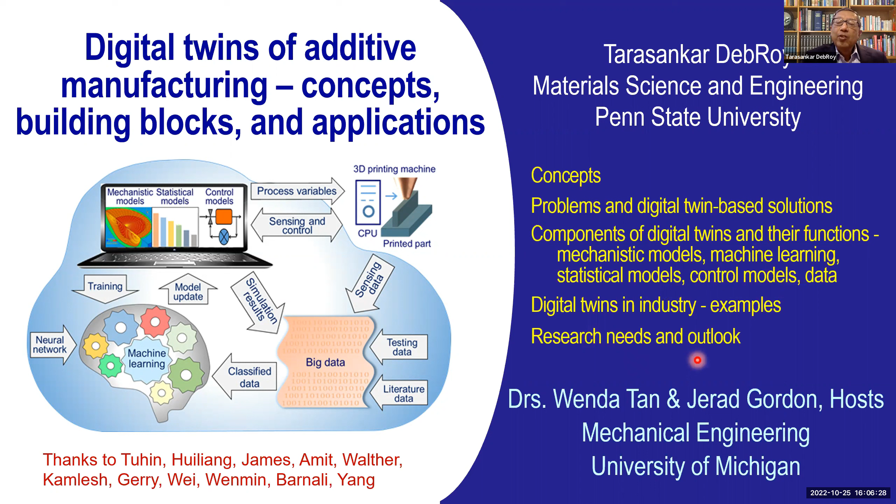Define a little bit about the components of digital twins, how it works, mechanistic models and data-based models, control models and data itself, and then how they are used in industry and what is in store in the future based on evidence.

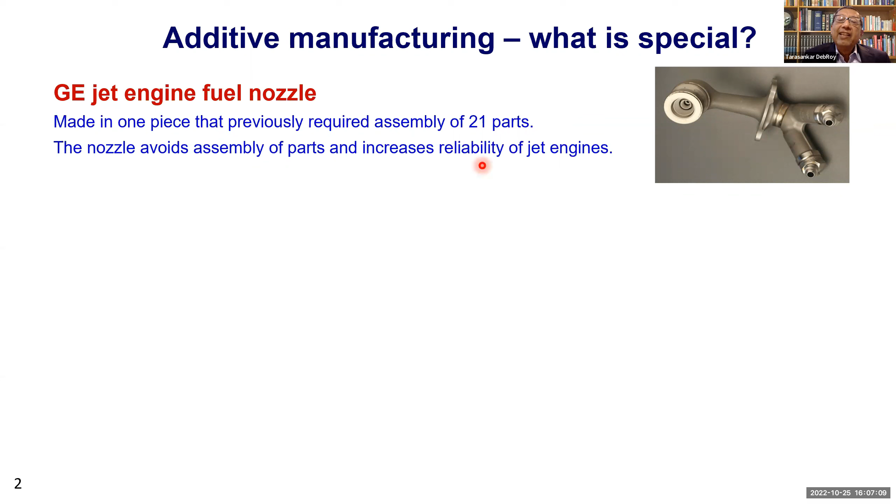So what is so special? The GE fuel nozzle is a component that is often cited as an example of the unique capabilities of additive manufacturing. This is made layer upon layer in thousands of layers, but previously it required assembly of 21 parts. Now this can be made with the new additive manufacturing process, and it has increased the reliability of jet engines according to GE.

We can make materials that are compositionally graded. This is a big deal in the nuclear industry, where we have many dissimilar alloy joints, particularly welded joints. These dissimilar alloy welded joints often fail because of high temperature degradation of property that we call creep degradation. Particularly carbon diffusion is very often one of the difficulties. By using a graded joint, we avoid the dissimilar alloy joints, and the properties of this particular joint are so much better that the component life can be extended by a very significant amount.

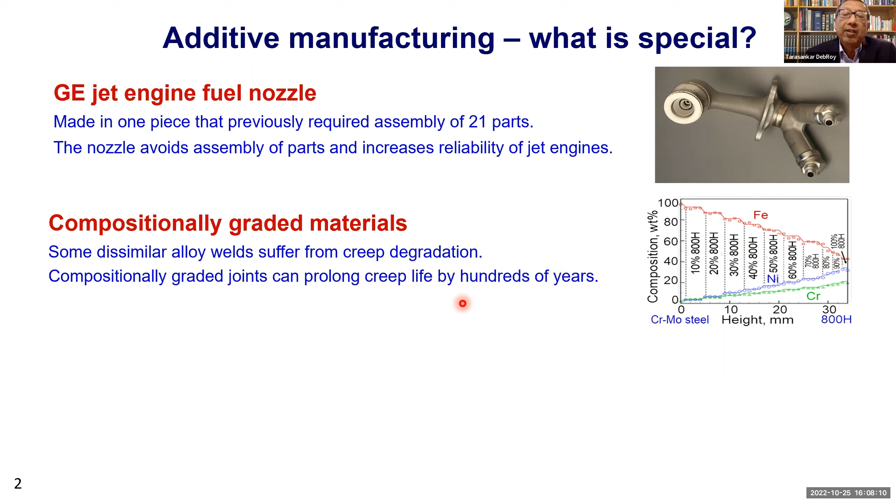Also, this same additive manufacturing machine can make numerous different parts. One example is the production of a ratchet wrench inside the space station. The people there needed a wrench, but there was no resupply mission planned. So NASA remotely printed a plastic wrench in 104 layers within the space station by just sending remotely a computer code. So there are many unique capabilities that make additive manufacturing a very desirable addition to our tools of making materials.

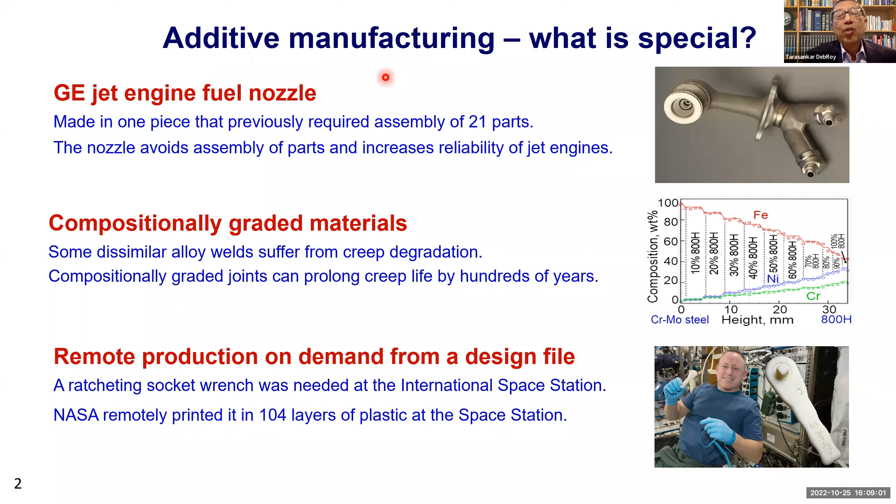I'm going to focus on metal additive manufacturing. There are many different techniques, but in particular I'm going to focus on three specific ones. One is called powder bed fusion, where we have very thin layers of powder, like 20 to 50 micrometers is typical, and powders are of small size, maybe 20 to 30 micrometers in diameter.

After one layer of powder is laid on the bed, we pass a laser beam, traverse it based on a computer program, and melt and deposit a layer of metal. We keep repeating this thousands of times until a 3D component is made. In this case, I am showing a statue of a lion, which is the mascot for our football team. So numerous different parts of intricacy can be made using this powder bed fusion laser process. The final finished product has a very good surface finish, and we can make parts as big as about 80 centimeters by 40 centimeters by 50 centimeters using a laser beam.

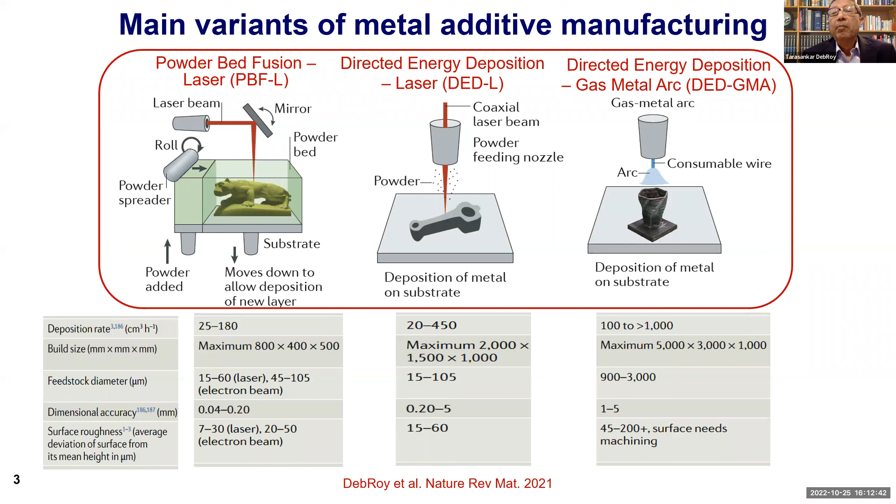Now, what is a digital twin? In short, it's a virtual copy of the process. But this definition doesn't begin to tell what exactly this is. It contains many tools of the virtual world, and it interacts with the physical world in real time using the internet. So it can check the health of the machinery, it can check the attributes of the product that is being made, it can avoid defects.

How does it do that? It does that by using different types of models, physics-based models, data-based models such as machine learning and statistical models, and overall, the performance of this virtual replica of the physical process improves with time because this tool also gets data and uses data. So more data means we can do better in terms of the quality of the parts that we make.

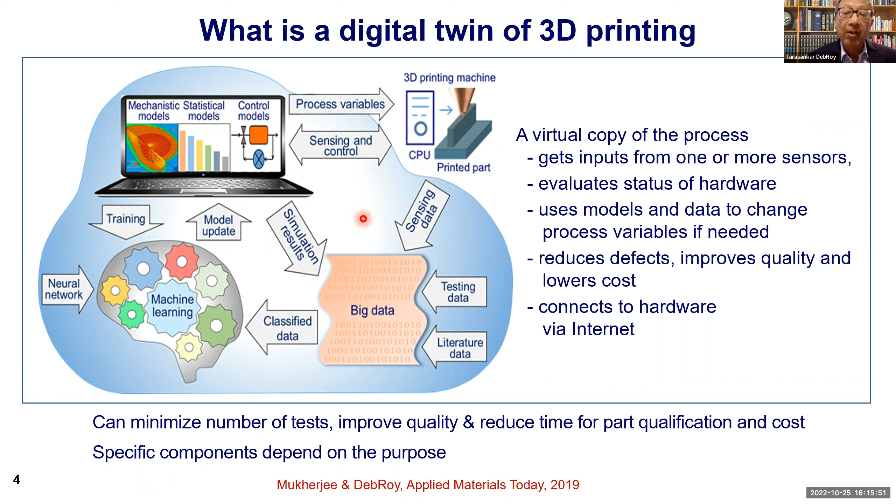So there are a lot of things here: machine learning, mechanistic models, statistical models, control models, big data, sensing and control, and process variable control, all of these. Although the digital twin per se is a tool of the virtual world, it does not operate in vacuum. It must have hardware for it to control the hardware. Of course, we can run the digital twin offline to plan for a process so that our process is sound and the parts we make are as good as we can make. And this is without any trial and error. This is all based on scientific principles.

So, what is a mechanistic model? By mechanistic model, I mean physics-based models that can tell us the effects of variables called input variables, and effects of properties of the material that we are depositing, thermophysical properties, for example. This model is a static model. It does not change with time. After it has been tested and validated, it's one model, whether I use it today or tomorrow. It is not connected to the production necessarily. It does not have to be connected via internet to a real unit for it to function, and it does not need any sensor. So this is a self-contained physics-based model.

Sometimes the physics is very complicated, particularly in a relatively new technology like additive manufacturing. So there we have data, and we can use the data in machine learning as well as in statistical models. These are data-based models that can be run anywhere for various input parameters. These can be dynamic. That means if we get more data from the sensing units of an additive manufacturing machine, the larger volume of data will improve predictions, and therefore the quality of the machine learning output and the statistical model guidance will be more appropriate, more correct. It may be connected to production, but does not have to be, and sensor data may be provided as inputs to the model. So you see, this is kind of dynamic.

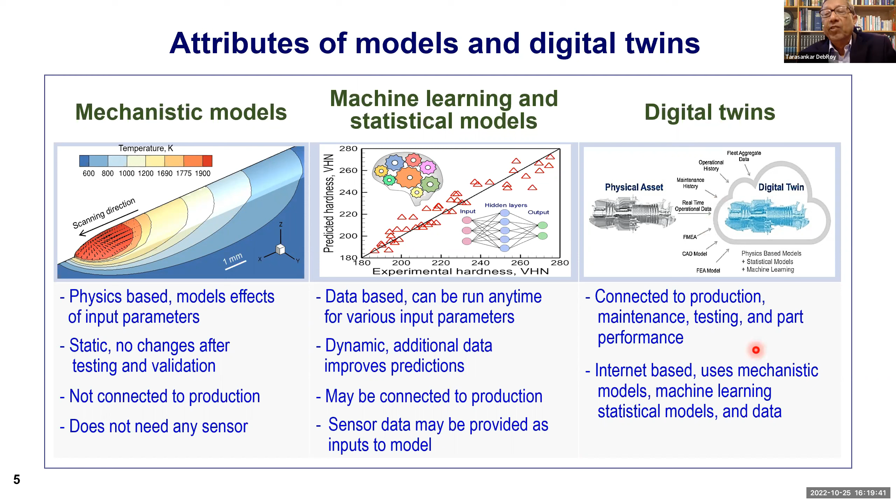So what's the basic problem that we are solving? We have said that additive manufacturing is a relatively new process. Let's look at some of the characteristics from the data reported in literature. We have a laser beam, an electron beam, or an electric arc as a heat source, so power is an important parameter. Similarly, between the heat source and the material there is a relative velocity that we call scanning speed. Scanning speed can vary by about 1,000 times, and power can vary equally by about 100 times.

And when the material experiences this variation of power and speed, the cooling rate that determines the scale of the microstructure also varies very significantly, from about 100 degree Kelvin per second to well over 1,000,000 degree Kelvin per second. And heat input, which is the ratio of power to speed, a measure of the amount of heat deposited per unit length of the specimen, that also varies by 10,000 times.

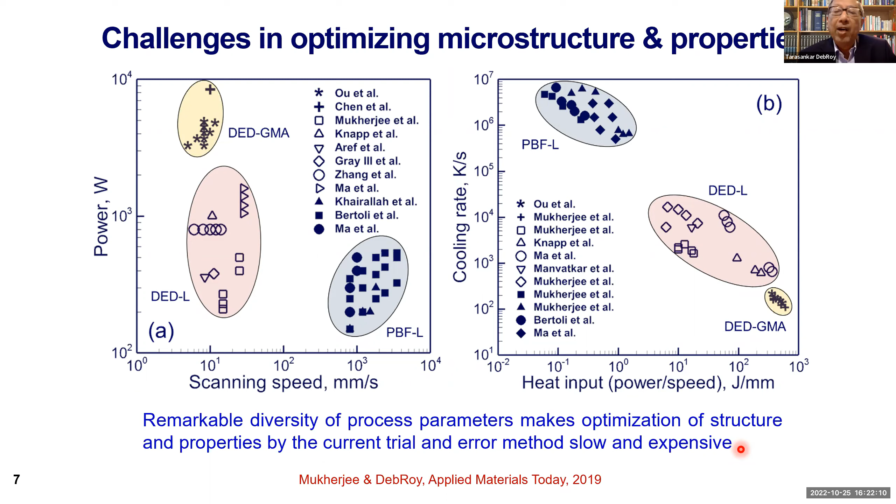The solidification growth rate and the temperature gradient also vary very significantly, and these two parameters control the morphology of the solidification structure, whether equiaxed or columnar. So there's a huge variation of temperature gradient and growth rate. And if you plot heat input versus properties, it's no surprise, because the cooling rates are different, the temperature gradients are different, the growth rates are different. The scale of the microstructure, the kinetics of different phase transformations, and the solidification morphology are all at play.

We have to be very careful in selecting our process variables so that we get the optimum values of part attributes. This is not a trivial task, particularly if we do it by trial and error.

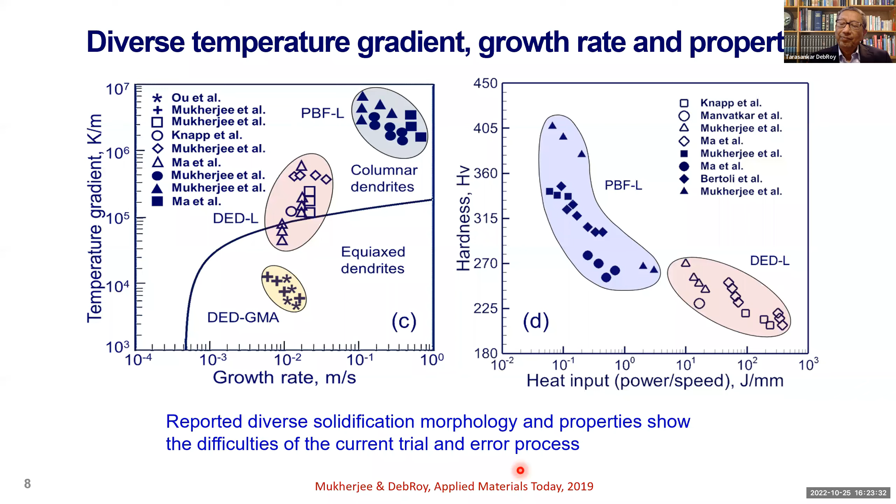So the challenges we face can be divided into three categories: scientific challenges, technological challenges, and economic challenges. I'm going to show you some of the challenges in each category.

Process, structure, property, performance relationship is what we do in material science. This is what we study, and our graduates study this for extended times. The goal is to control the microstructure, defect formation, and control the morphology of the solidification structure and grain structure. All of these are at play, so these are some of the scientific issues we have to deal with.

In terms of technological issues, part qualification is a big deal, because if the parts are not certified, we have to redo them again, and that is very expensive. Then, we can make very complex things using additive manufacturing, but there are limitations of complexity. There are geometric limitations on what we may be able to do easily versus what is very difficult to do. And then there's scaling up.

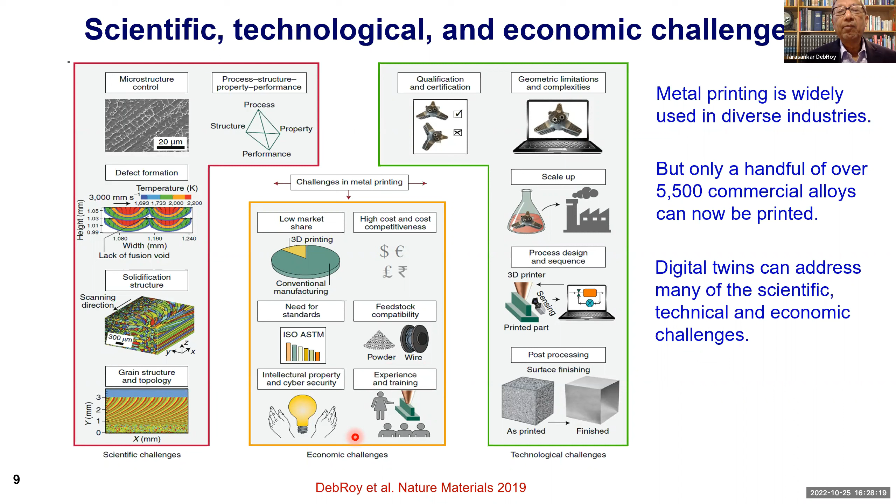Feedstock compatibility is a problem. Not all metals and alloys are available in powder form or wire form. So that is a difficulty. And because it is a newer technique, intellectual property and experience and training of people are also an important economic challenge for making parts using additive manufacturing.

So one of the ways of reducing uncertainty is to use scientific principles of physics, right? That we call mechanistic modeling. And what does the mechanistic model do? It correlates the input, which is very often process variables and thermophysical properties, and attributes of the part as output.

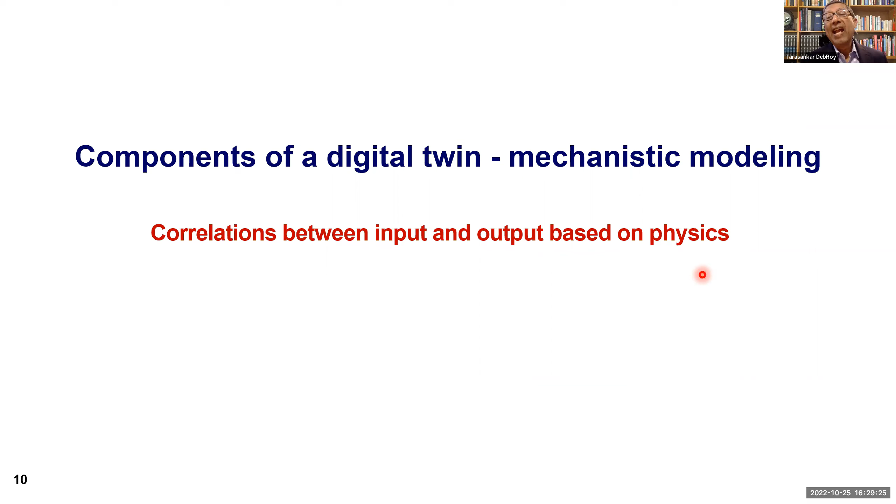What are the attributes that we are concerned about? Microstructure properties in general, but a lot of other things. They will become clear as we make progress in this presentation. But we are relating input with output based on laws of physics. So what's the requirement for being able to do that? We need to know the mechanics. We need to know the mechanisms of action. Otherwise, we cannot apply the laws.

So capabilities of mechanistic models. Let's say that we have developed a mechanistic model. We provide the process variables and thermophysical properties of the alloy as input. And what do we get as output? Transient three-dimensional temperature fields, cooling rates, temperature gradients, solidification growth rates, all of those parameters, as a function of time and position within the part.

We also get some idea about the defects because these models can compute the geometry of the fusion zone. And there has to be significant overlap in nearby tracks and nearby layers. So there cannot be an open space, because if there is an open space, there will be lack of fusion voids. Also, the heating and cooling based on the component property can result in residual stress and distortion of the part. So that is also something that can be modeled based on physics and mechanics.

Microstructure models are being developed. So that also can be predicted based on transient three-dimensional temperature fields and other parameters that we calculate from mechanistic models. And grain structure and morphology can be computed.

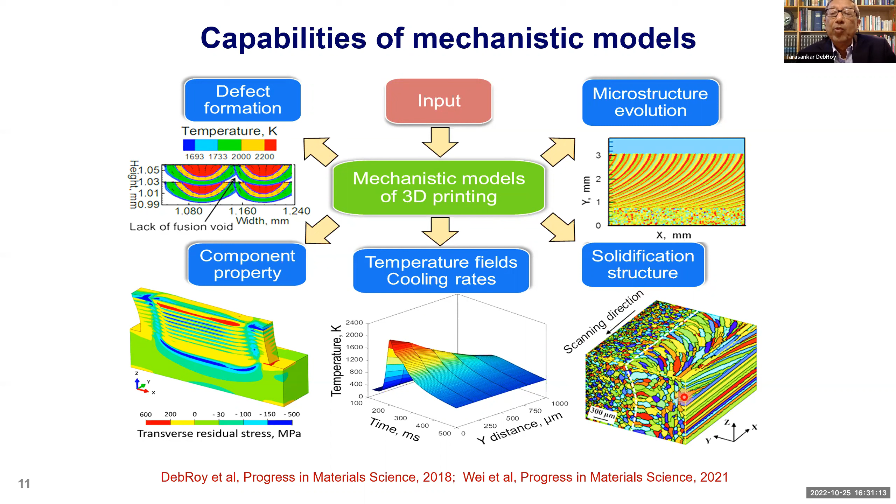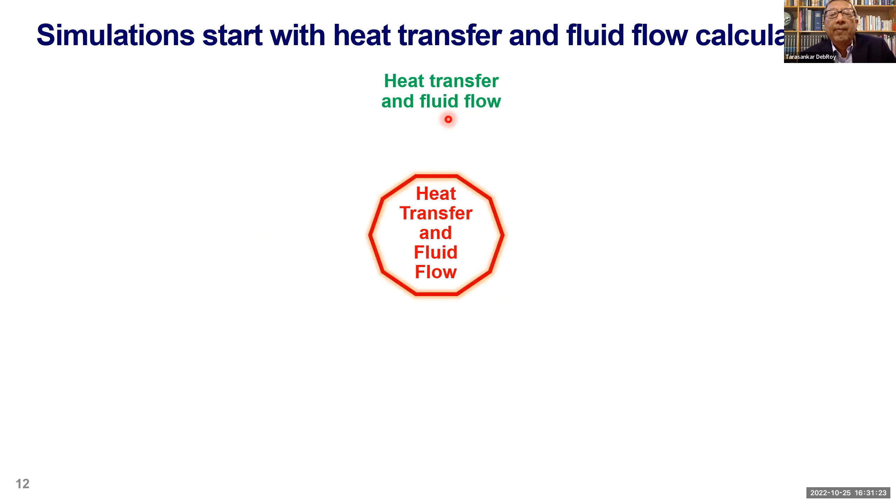So where do we start? We often start with heat transfer and fluid flow calculations. This is a requirement for understanding time, temperature, excursions at various locations within the part. Thermal cycles is what we call it. It can also take into account the thermophysical properties of materials. So the role of alloy and AM process variables can be evaluated using a heat transfer and fluid flow model.

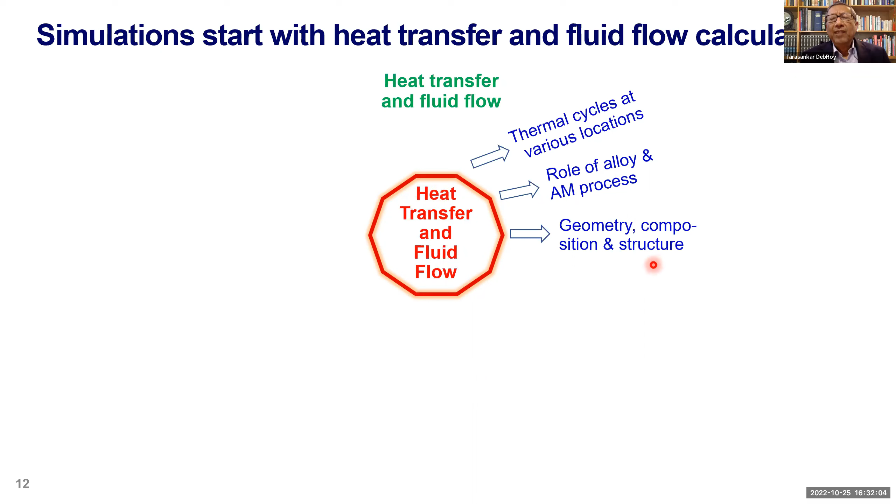We can determine the geometry, composition, and structure. Why composition? We already know the composition of the feedstock. Why do we need to worry about the composition anymore? For various reasons. Composition is not homogeneous. The material that we deposit is inhomogeneous in various scales.

A simple example: let's say I'm depositing a 6000 series aluminum alloy that contains volatile components like magnesium. Aluminum and magnesium have different volatility. So selectively, magnesium would be vaporized. So the composition of the part can be different from the composition of the feedstock material. So we have to worry about not just the structure and geometry, but composition as well.

We have to worry about different types of defects. Spatial and temporal variation of cooling rates can give us variations of property and microstructure. So if we want to understand microstructure and mechanical properties, we need a heat transfer and fluid flow model. Residual stress and distortion - temperature field is a required input to such models. So if we want to minimize trial and error testing, we need a heat transfer and fluid flow model, to understand composition change, grain size, topological features, and finally, printability.

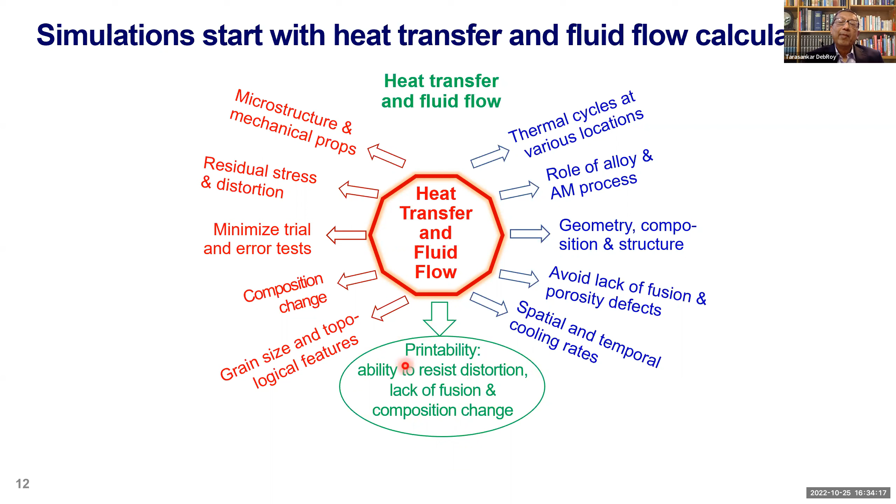Printability - all alloys are not equally printable. Some alloys are easy to print, others are not able to resist distortion, lack of fusion, composition change, and so on. So some alloys are easy to print, some alloys are not so easy to print.

So these blue, we have pretty good models. The ones that are in red, the models exist, but they are still being developed.

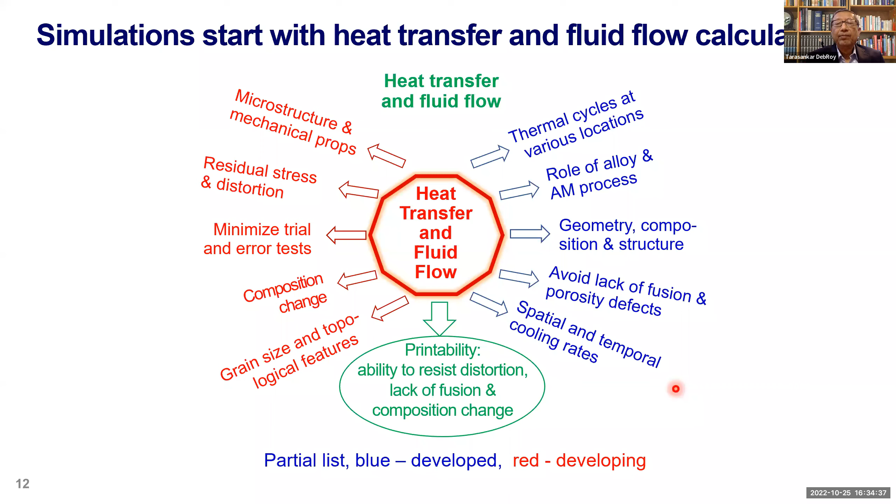So what does it provide? Let's say I have a monitoring location and I'm building this wall using additive manufacturing. So I put a thermocouple here and measure temperature versus time plots. See the type of peak and valley that we get in this.

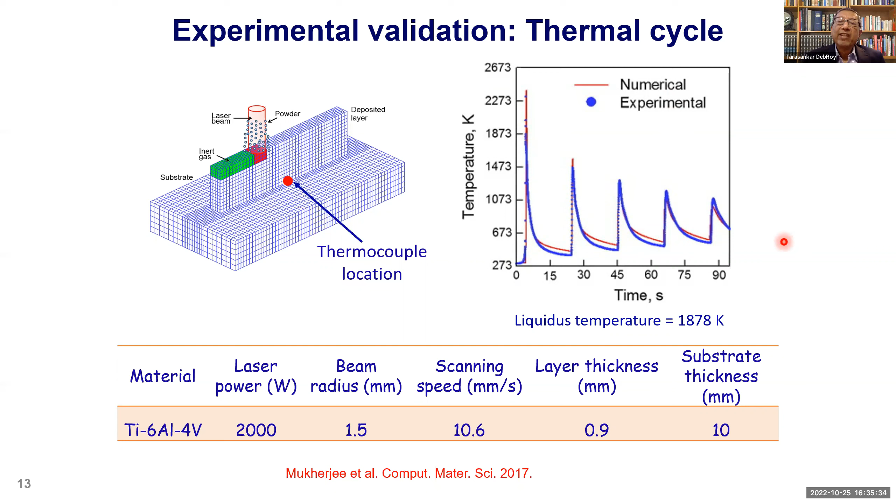So what type of models are these? They are basically Navier-Stokes equation solvers and Fourier second law solvers. So they are numerically simulated, numerically computed, and calculations are pretty reliable for calculating the thermal cycles for different process conditions. It also calculates temperature fields and cooling rates, but also calculates the fluid velocity.

So these are streamlines. Liquid flows from the middle to the periphery because of spatial gradient of interfacial tension, which is a stress known as Marangoni stress. Because of this Marangoni flow, we have mixing of the liquid within the fusion zone, and that determines the temperature field, the temperature gradients, the cooling rates, and all kinds of other parameters.

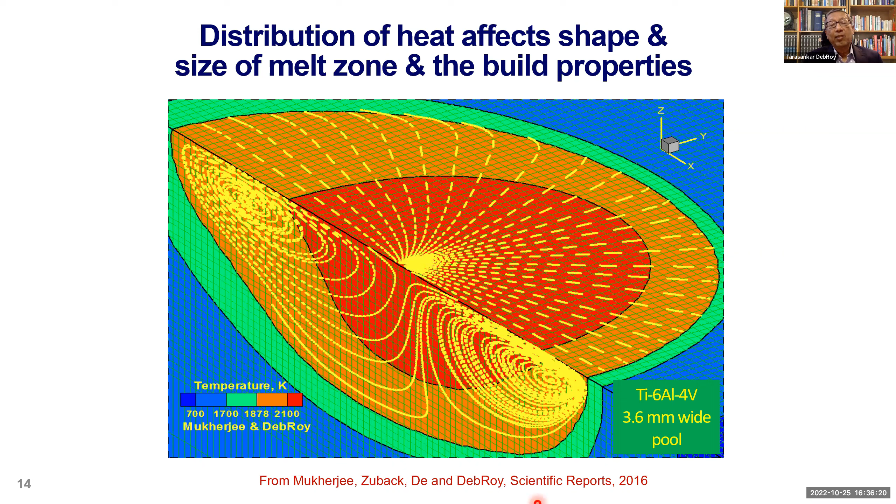The fusion zone geometry is not always hemispherical in nature. It depends on two parameters: Prandtl number, which is the ratio of momentum diffusivity to heat diffusivity, and Marangoni number, which is a measure of the strength of the Marangoni flow velocity. Large velocities would mean large Marangoni numbers. So depending on Prandtl number and Marangoni number, we can have a hemispherical pool, or we can have a pool that is shaped like a W or like a bracket.

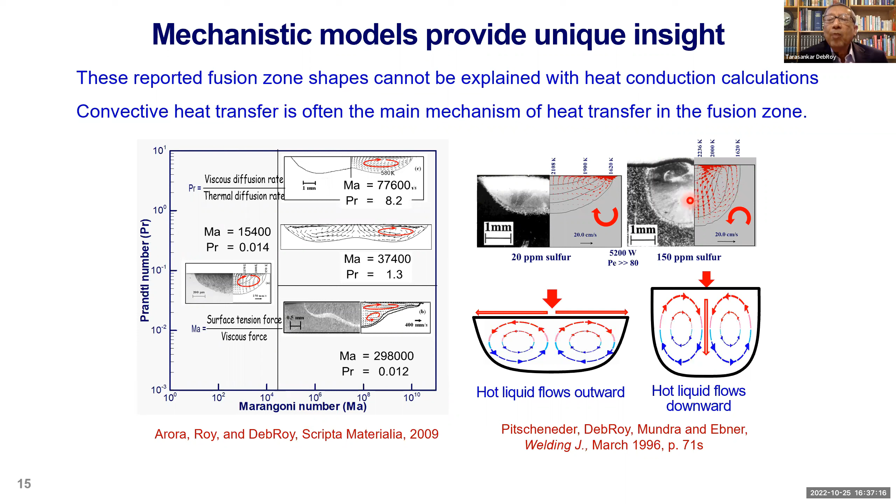Also, composition is very important. If we have a small amount of what we call surface active elements, such as oxygen, sulfur, selenium, tellurium in steel, they change the temperature coefficient of interfacial tension, which is a physical property. Depending on that property, we can have a flow going from the middle to the periphery, or a flow going from the middle downward. It will act as a thermal drill, because right in the middle of the pool, the temperature is much higher than at the periphery.

So if we have hot packets of fluid coming down, we will have a deeper and narrower pool. If we have fluid going sideways, we will have a shallow and wide pool.

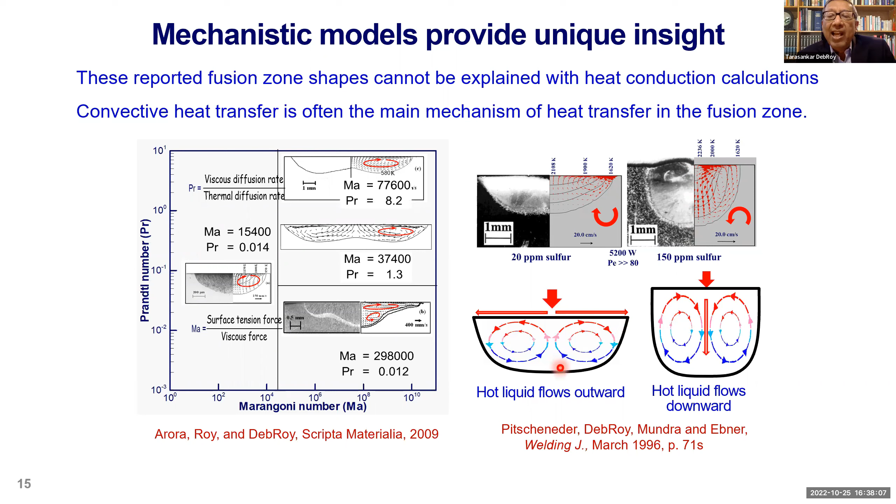So if we compare the three additive manufacturing processes we discussed - powder bed fusion laser, directed energy deposition laser, and directed energy deposition with gas metal arc power source - the size and shape of the fusion zone will be different. They can be simulated. I want to mention that the scales of these are very different. This length is about 8.4 millimeters, whereas this length is only 0.6 millimeters, so there's a tenfold variation in terms of length scale.

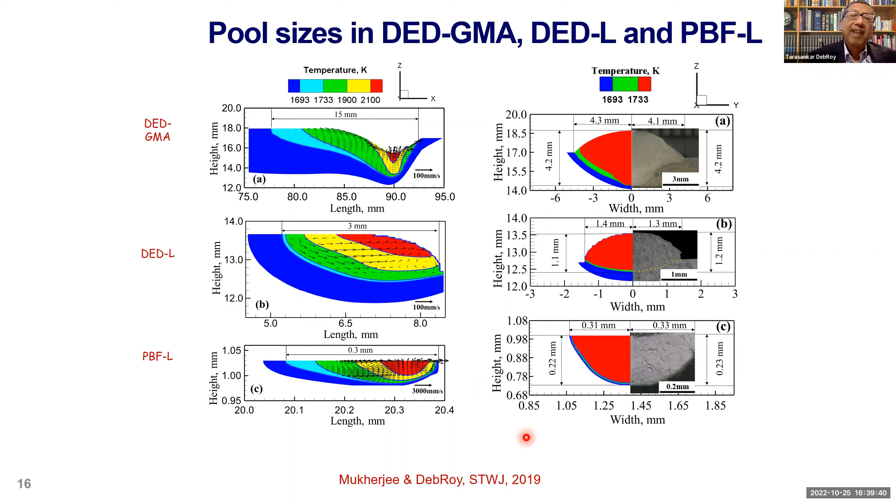Also, the morphology of the shape of the zones is different. Here we are depositing powder. Here the arc is depressing the liquid, and in powder bed fusion, this is a very tiny, teeny pool, 0.3 millimeters in length, so this may be 50 to 100 micrometers. So the size is different, the temperature fields are different, and everything else like cooling rates and geometry will also be different.

Power and speed are also very important. If we have higher laser power, we are depositing more energy per unit time, meaning there will be a bigger pool that cools slower, taking more time, so the structure would be coarser. If we take stainless steel 316 and measure the secondary dendrite arm spacings, they will be somewhat larger than if we used a smaller laser power, simply because lower power means faster cooling, so the coarsening will not be as pronounced as at 2.5 kilowatt power.

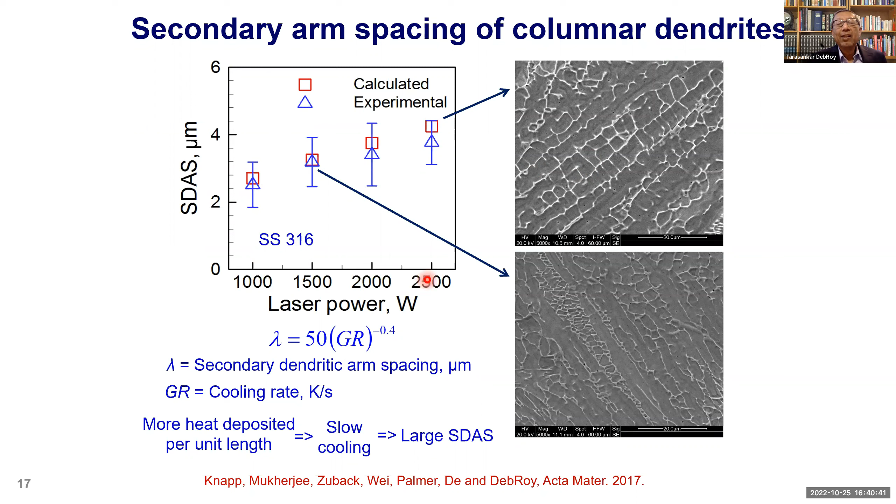Similarly, if we take an aluminum alloy and look at the morphology, how the grains change, the grains would be mostly columnar, except right in the middle - I'll show this more closely in the next slide. The morphology depends on temperature gradient and solidification growth rate; these are the most important parameters. The cooling rate determines the scale of the microstructure, but not the morphology.

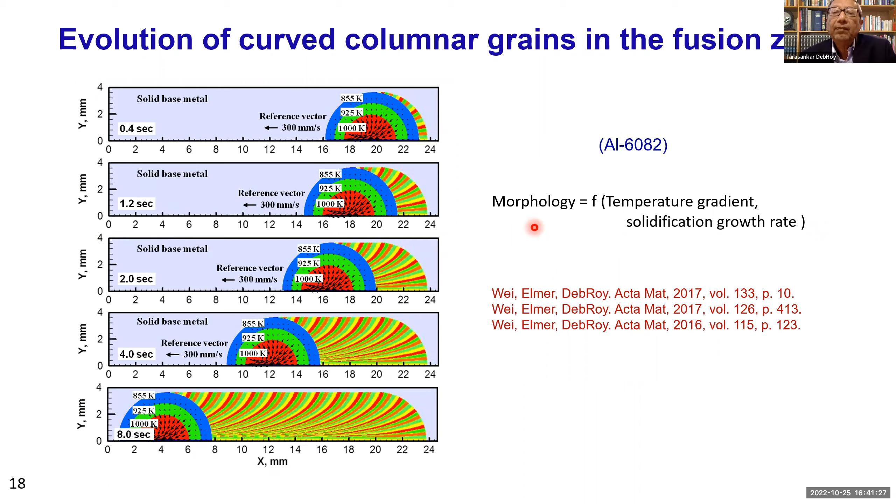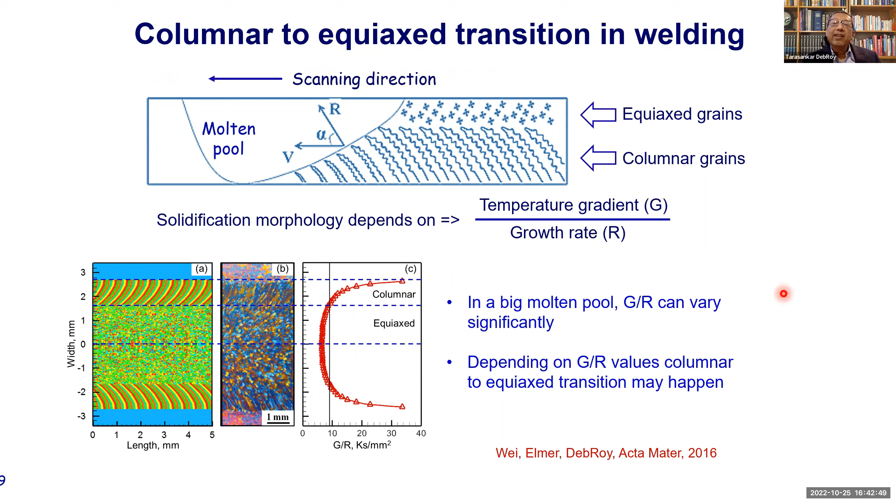It's varying from 0 to 40 here in this scale. And you can see right in the middle, we have a low value of G by R, which is this ratio. So we are getting equiaxed grains in the middle, and outside of this region, we have columnar grains because of the high values of G by R. And that is what the model can predict.

So models of grain growth can pretty much tell us what to anticipate in terms of the morphology of solidification. I want to show you some research we published about 7 years ago, in collaboration with Professor Mazumder of this department, late Professor Mazumder, I must sadly say. What I'm showing you is unidirectional scanning from left to right always.

And what you get is a fusion zone like this. The solidification occurs as we move this liquid along, and the heat flow direction is perpendicular to the fusion line. So here the heat flow direction would be where my cursor is showing. So for a face-centered cubic material like Inconel 718, they will grow along this direction. And this is what we actually see when we do the experiment. These experiments were done in the mechanical engineering department here. We did the simulations.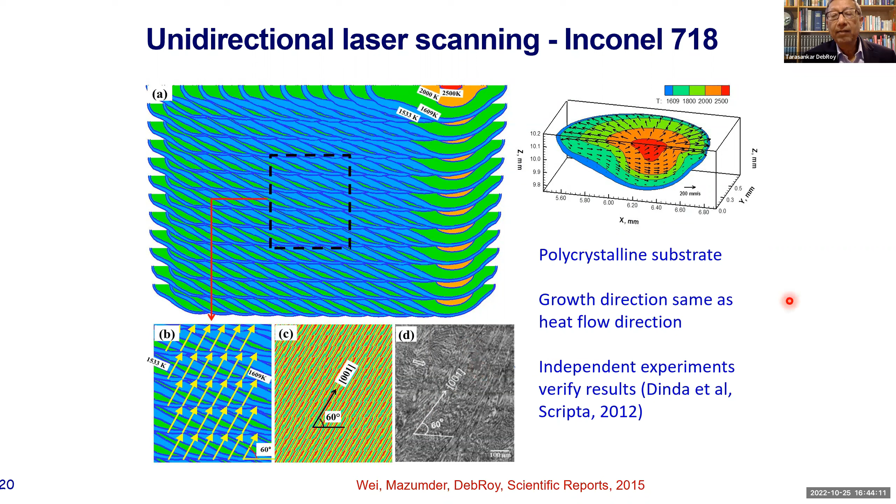Now we want to change the rules. We want the laser to go from left to right, then backwards from right to left, then left to right, right to left. So it's going this way, that way, and we will call this bidirectional scanning.

So we have a polycrystalline substrate, 718, and the heat flow direction would be different, right? Because when we are going from left to right, the fusion zone looks like this one. The isotherms are compressed ahead of the beam, and expanded behind the beam. Whereas when it is going right to left, the fusion zone is somewhat like this here. So here the main heat flow direction is perpendicular, about a 60-degree angle here, whereas here it's at this angle.

So they are different, so I'm going to show you that. These are the directions of heat flow now. And look at the orientation of the crystals — they change in a zigzag manner, just like we would have expected from simple heat transport.

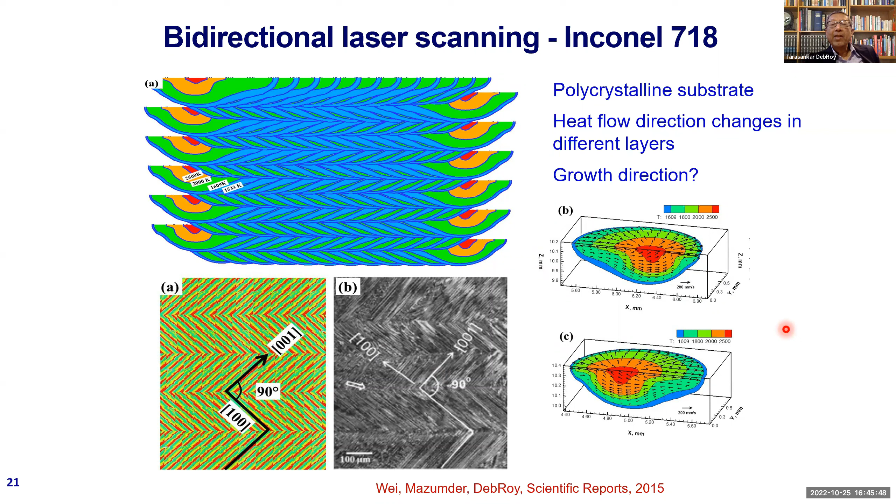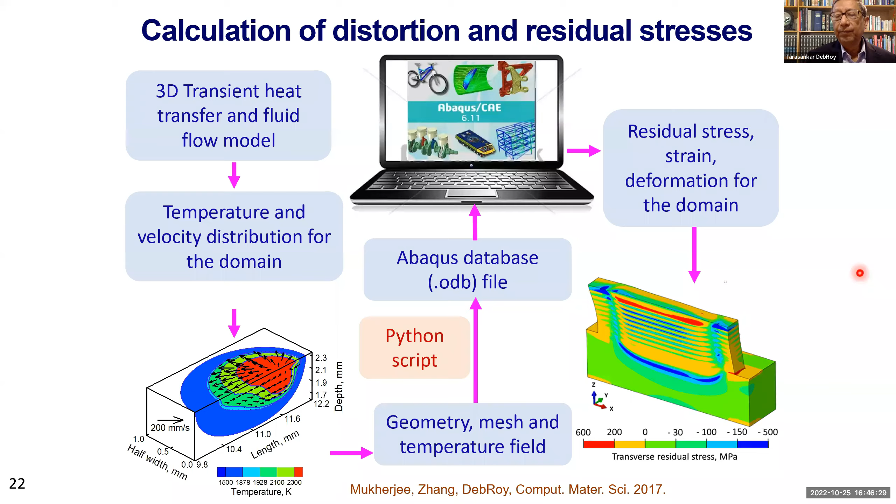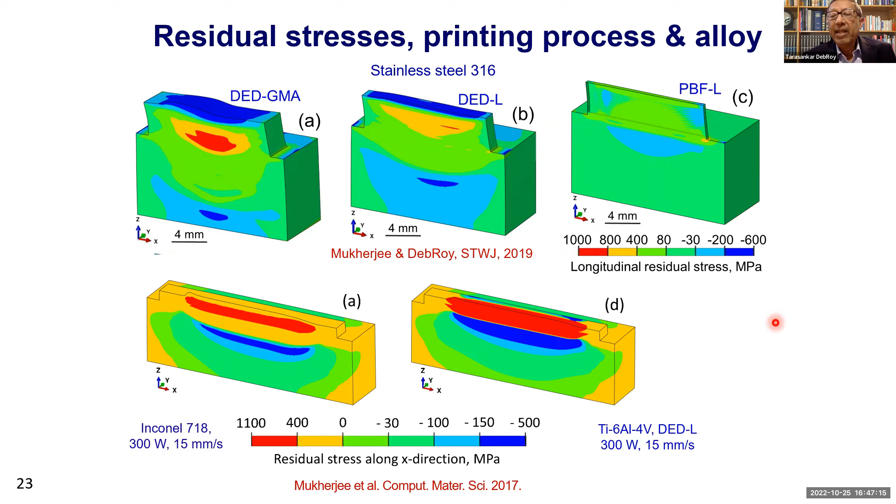And we can calculate the relative values of residual stresses for directed energy deposition gas metal arc, directed energy deposition laser, or powder bed fusion laser. Powder bed fusion laser has the smallest size of the fusion zone, and the residual stresses are the lowest, whereas gas metal arc directed energy deposition has larger residual stresses. We can also check the relative values of residual stresses for different materials under different conditions. So those are some of the benefits of doing these models.

Not everything can be done by mechanistic models because of the lack of mechanistic understanding. There we use data-driven relations, either based on machine learning or statistical modeling. So I'm going to give you an example.

The problem with an Abaqus model of residual stress is that it takes a long time to do these calculations. Whereas if we can take the data from the Abaqus model offline and make a neural network, we can probably get values of the maximum tensile longitudinal stress, which is very often a big problem in additive manufacturing. And we can generate a neural network so that after it has been validated and adequately tested, we can use it to get mean values of, say, maximum longitudinal residual stress and other parameters.

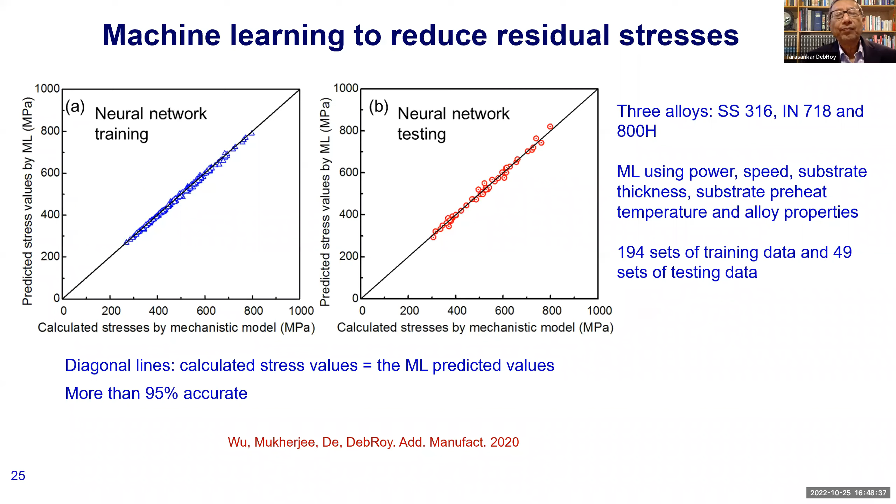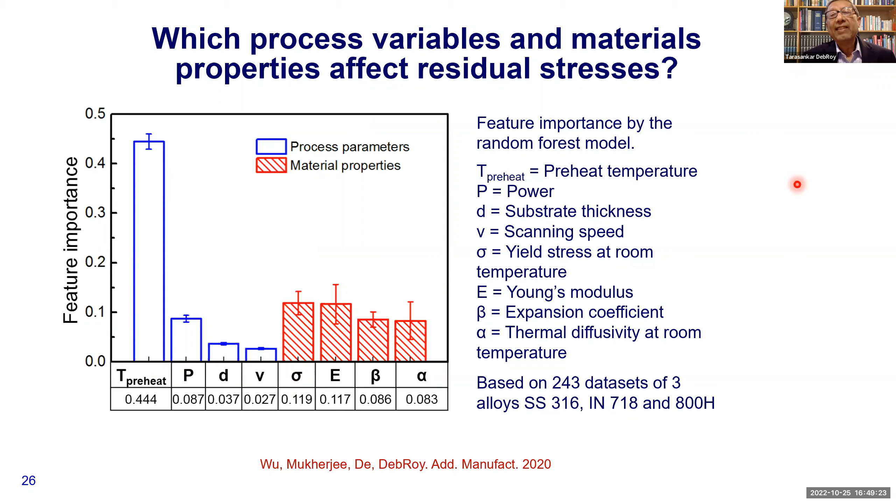We can also figure out which parameters are more important and which are less important for developing residual stress — feature importance, if you will. For example, here we are showing that preheat temperature is very influential in controlling the residual stress. So if we want to lower the residual stress, we need a preheat; higher preheat temperature is beneficial. And then there are other variables like yield stress at room temperature, which is important, but not as important as the preheat temperature. So these are some of the benefits that we can gain.

If I wanted to do experiments by trial and error to avoid cracking, a two-level design of experiments would mandate 4,096 experiments. But if I look at the non-dimensional numbers, I can bring these 12 variables down to only 4, so we'll need 16 experiments instead of 4,096.

How so? Think of the flow of a fluid through a pipe of circular cross section. If you wanted to know the structure of the flow, laminar or turbulent, you will need to know the diameter of the pipe, the velocity of the fluid, the density, and the viscosity. So how many variables? 4 variables. But someone who has studied fluid mechanics will say, I don't need 4 variables, I can use just Reynolds number.

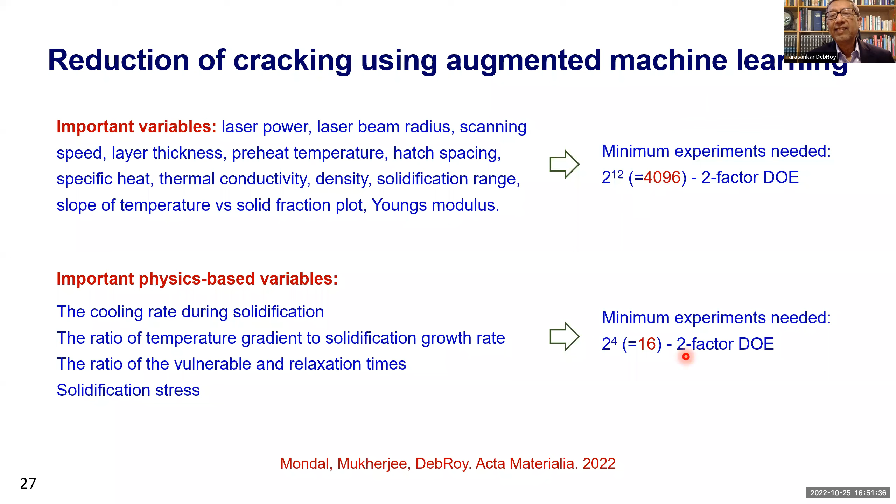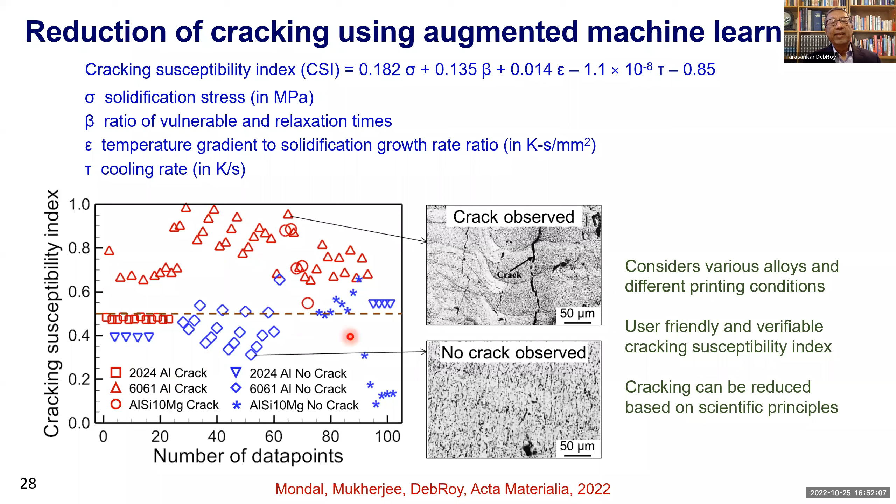This is an example. How so? If we take these 4 variables, solidification stress, ratio of vulnerable to relaxation time, temperature gradient to solidification growth rate ratio, and cooling rate, we can do a regression analysis to form a cracking susceptibility index. A higher cracking susceptibility index is bad news, a lower value is safe, no cracks are observed.

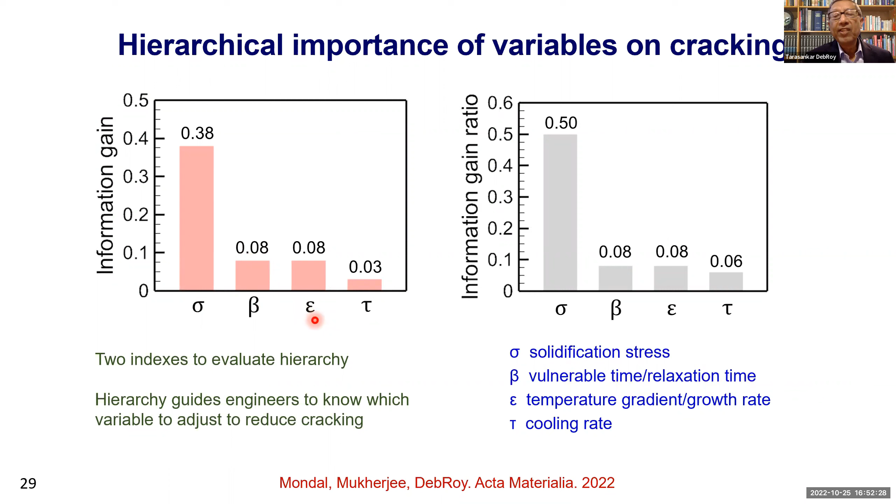Again, we can do feature importance. The solidification stress, sigma, is the most important variable, followed by the other 3: vulnerable time to relaxation time ratio, the temperature gradient to growth rate, and cooling rate. So we can do a lot with data-based models.

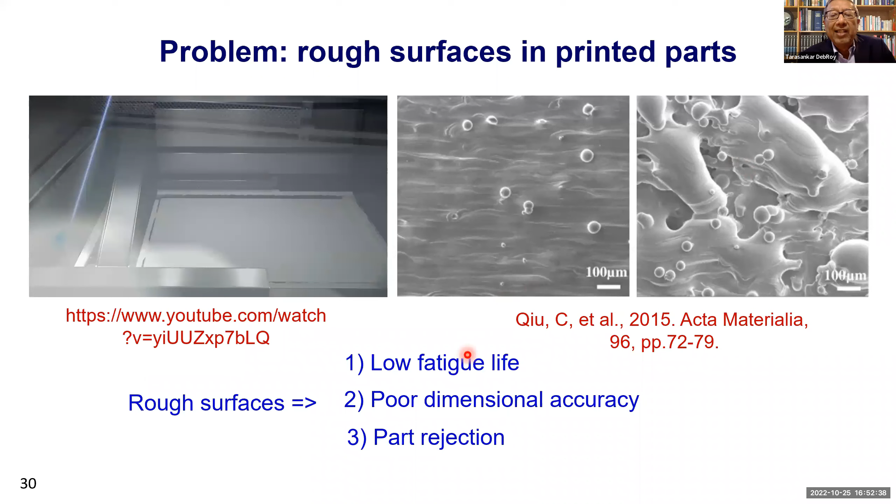Rough surfaces are a problem because they lower the fatigue life, they give lower dimensional accuracy, and in extreme cases it results in part rejection. So what can we do? We take all the variables, we take their dimensions, and we do a simple Buckingham pi theorem. Based on our data, we take the correlation based on Buckingham pi theorem, and we can do rapid screening of a whole lot of experimental data using dimensionless correlations very, very quickly.

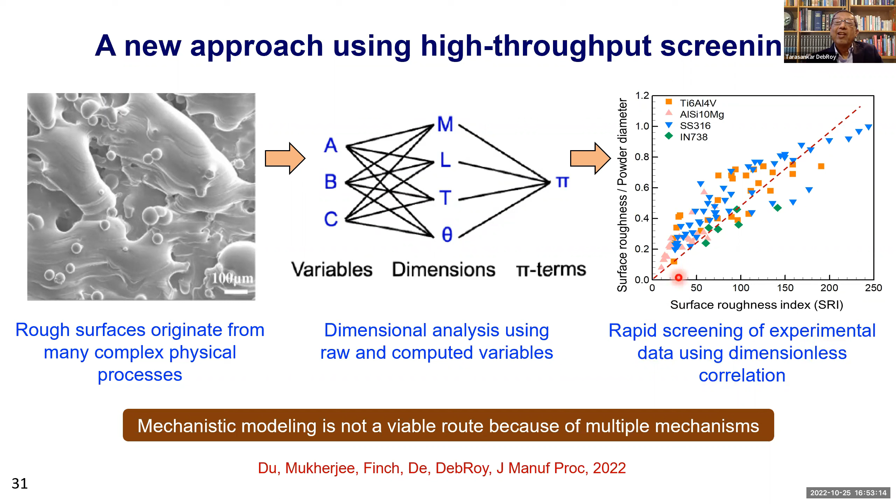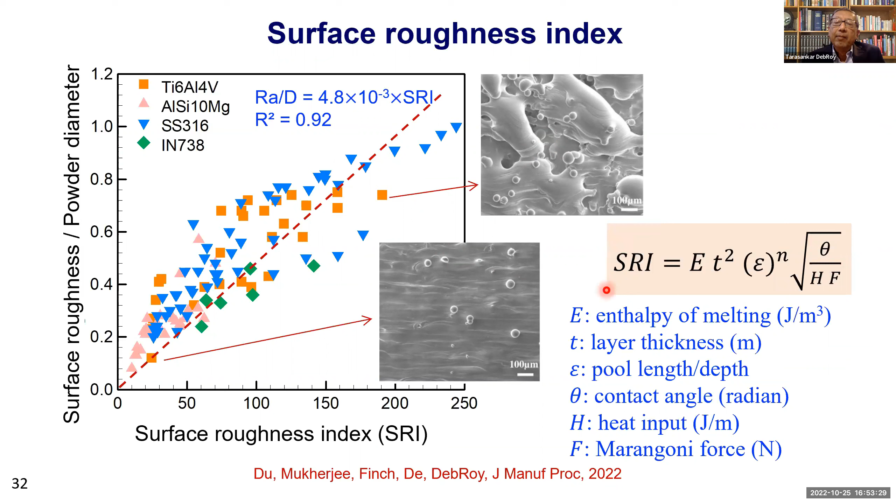Thereby we can get conditions for smooth printing of metallic parts, using correlations obtained by data-based models. Feature importance can also be determined, like heat input is the most important variable and contact angle is not so important for surface roughness here.

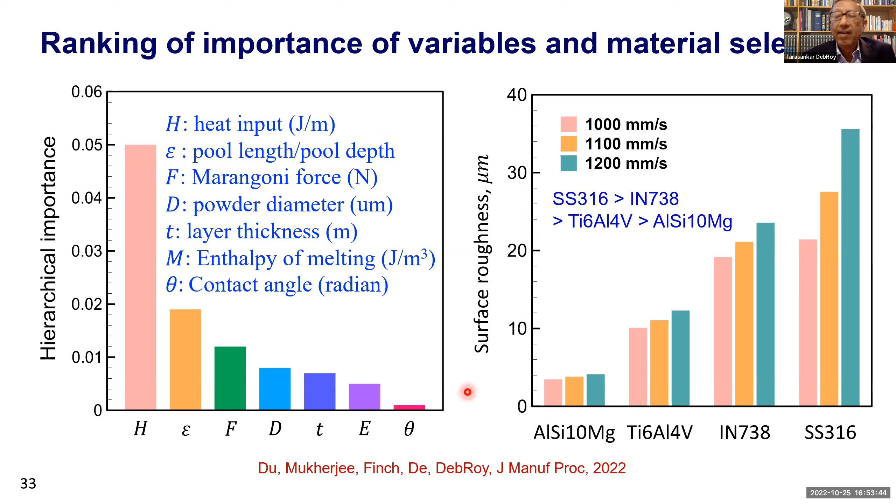So we understand that these are some of the components of a digital twin. Tools of the virtual world and physical world have to work together, right? So what are some examples? How do we actually make use of the digital twin in real time?

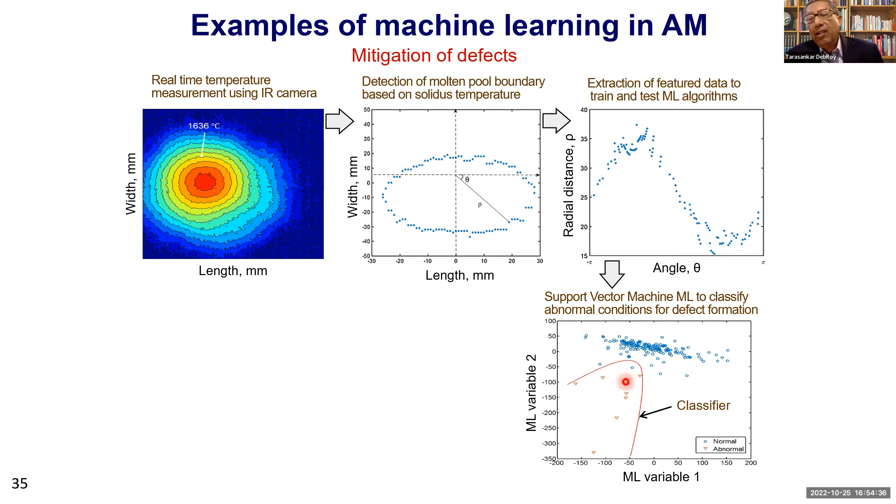Using support vector machine or some other common tools of machine learning that are available freely, we can separate the cracked parts from the conditions where no cracks would be observed.

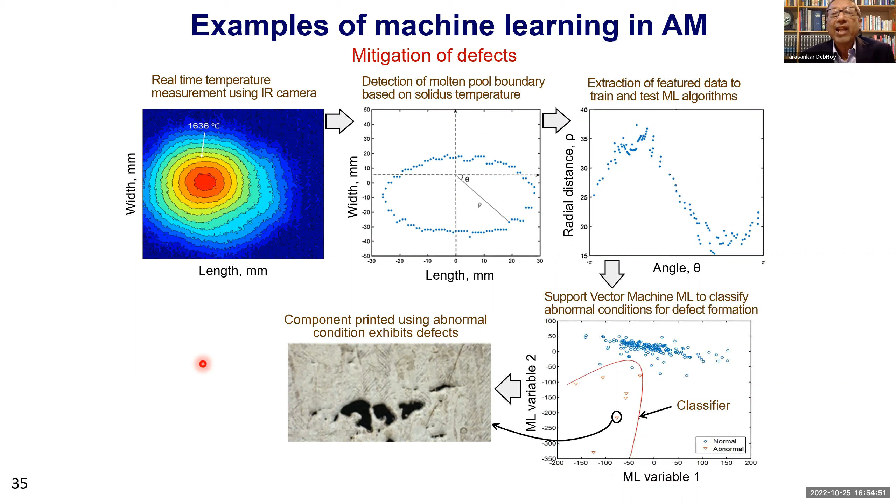So how do we actually implement this? Well, one of the ways is to have a sensor, thermal imaging sensor, or a strain gauge to measure the distortion. This sensing data will be fed to a control model, and the control model will change the process variables in order to get structurally sound and reliable parts.

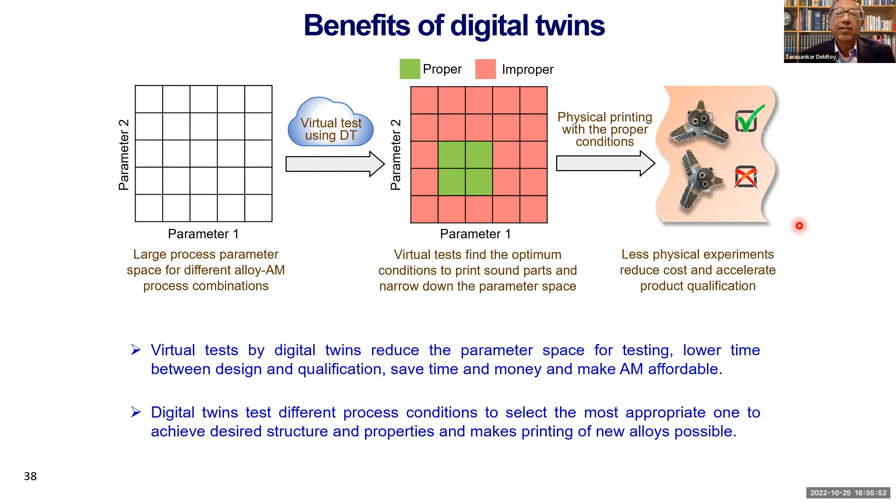So the benefits are many. First, remember I said the parameter space is very large, cooling rate had a very large range, temperature gradient had a very large range. So one of the things of virtual testing using digital twin is to reduce this parameter space. Therefore, the physical printing is likely to result in sound parts. That is one of the benefits of using virtual testing with digital twins.

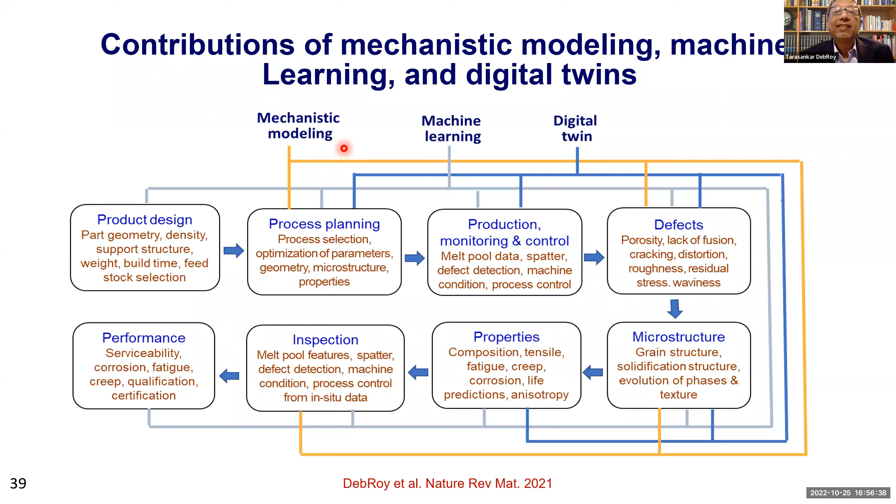So we are talking about mechanistic modeling, machine learning, and digital twins in simple terms. If you look at all these steps like product design, process planning, production, monitoring and control, defects, microstructure properties, inspection, performance, machine learning can do all of those steps. Digital twins are very helpful in controlling so many of the attributes, and so are mechanistic modeling. So all these can work together to give us a better product.

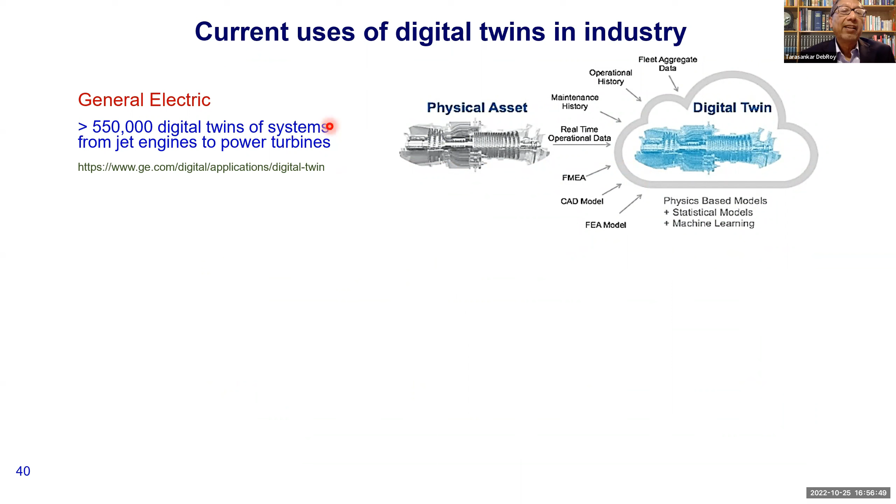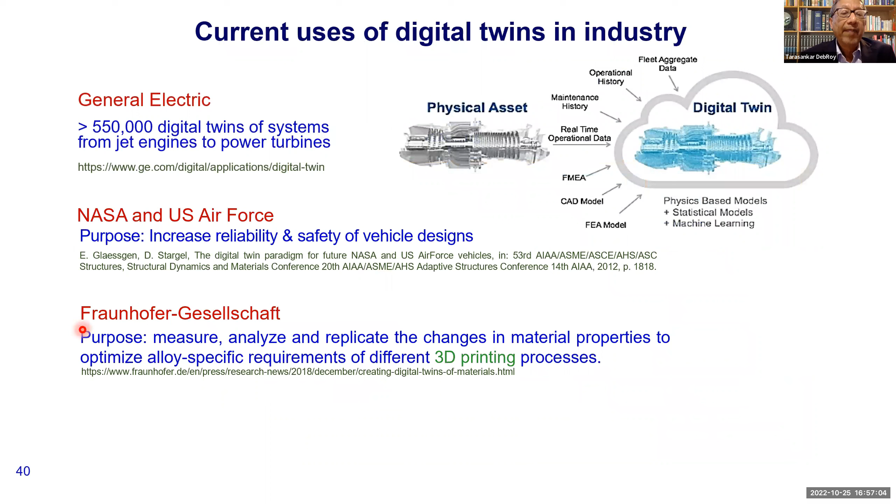Currently, digital twins are widely used in industry. General Electric uses more than 500,000 digital twins. NASA and the US Air Force use digital twins to increase reliability and safety of vehicle designs. Fraunhofer uses them in 3D printing, and so does Siemens.

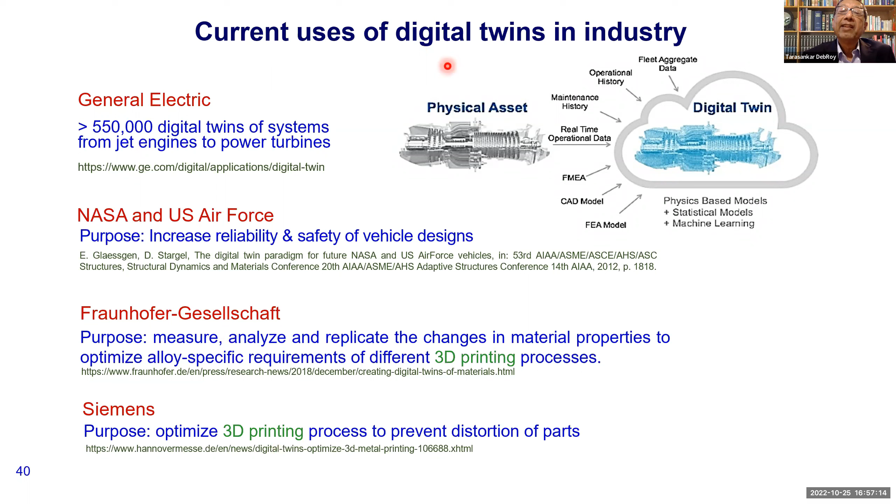So digital twins are here to stay. They are being widely used in industry, and we can still improve them if we have more data—for example, printability data and microstructure property data that are alloy specific. So for these, we have to be patient. There's sharing of data for machine learning, and digital twins are also alloy specific.

But if we look at the sales data for equipment, I think the outlook is pretty good. Using digital twins, we can improve quality without trial and error. We can select the right alloys for a part, and we can do our qualification very quickly. All these things will lead to market expansion.

That is all I have. Thank you.

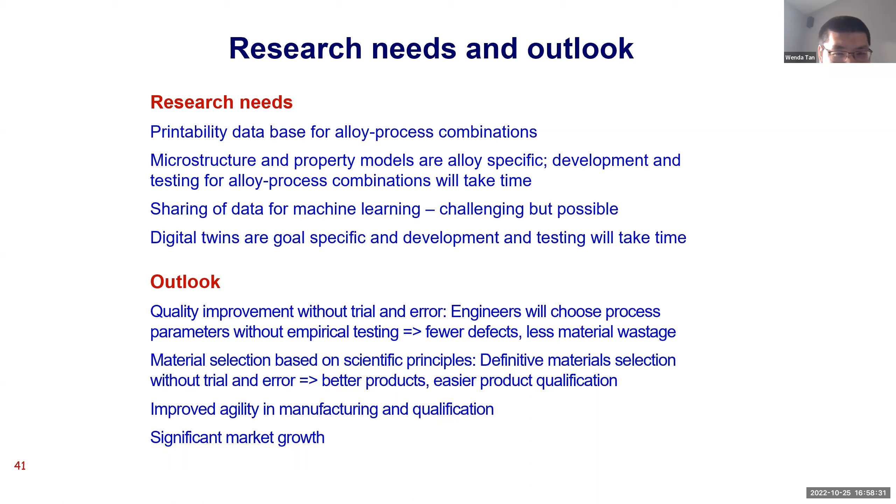Thank you, Tarasankar. Wonderful presentation. One of your early slides showed a correlation between hardness and heat input. Just a clarification—this is purely empirical, right? There's no physical model relating the two.

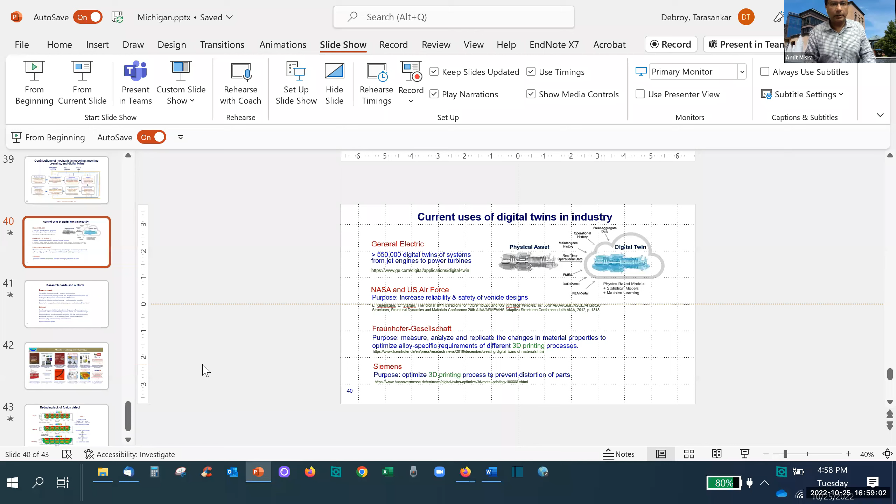The physical model is this: we synthesize the temperature-time history with JMA kinetics—Johnson-Mehl-Avrami kinetics—to compute the hardness values. We have done so for H13 steel as well as for grade 91 steel. But these are alloy-specific relations. There's no fundamental basic theory that I can use for all alloys. Am I making sense?

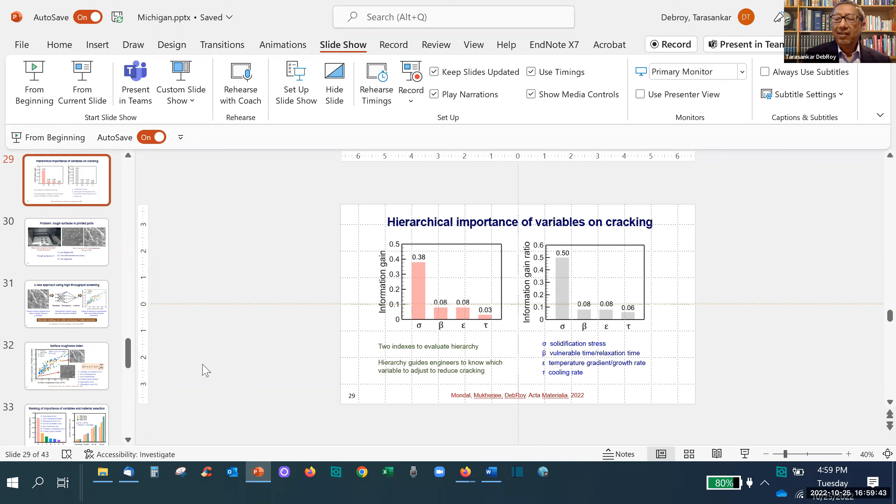Yeah, I understand. For a given material, you can use the JMA model and calibrate it. Yeah, it's not as fundamental as I would like. Thanks, Amit, for the question.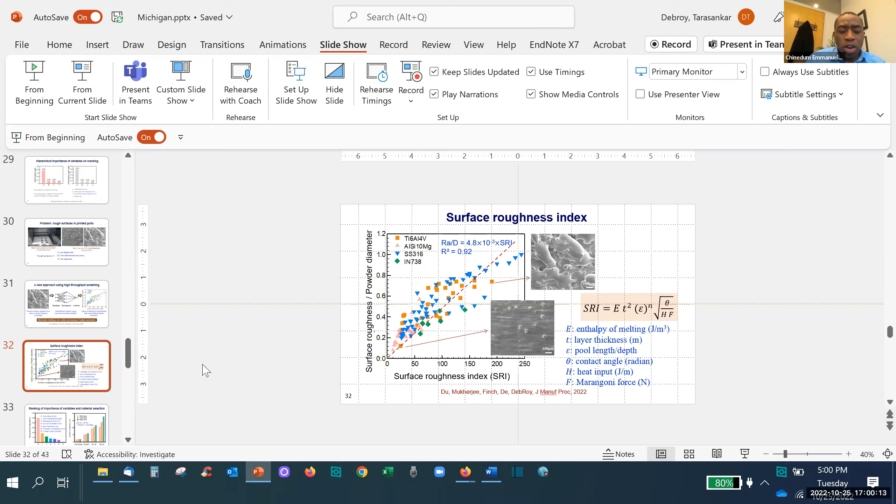So let me answer that. It's impractical for most systems, and I'm very sad to say that, because most systems that we can buy are closed systems. There's no space to put any sensors, and you also cannot get into their software. So that is out of the question.

But this is something that can be done in a system if you make one—let's say you make one to print a very large part using DED-GMA. Then it is much more practical. Who's doing that? Only for research and development. I don't know of a company that uses that for production. What GE does, I do not know—in Alabama, they have a large factory to print fuel nozzles.

So do they have some sensors? GE uses more than 500,000 digital twins, so it would be hard for me to imagine a situation where they are not making use of the technology that they are a leader in.